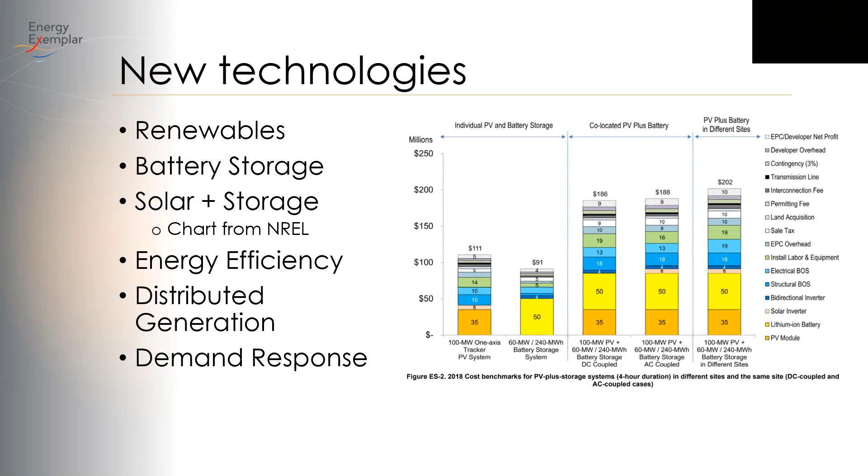So there are a number of different processes that are requiring a rapid pace of insight. IRP for many utilities was optional until fairly recently. A lot of utilities are being required to conduct IRP analysis that they formerly were not required to discuss or produce to the regulator. And very often the breadth of those IRPs are also increasing.

So where once it might have been adequate to do a study that focused primarily on thermal resources, in many jurisdictions, an IRP that doesn't take into account renewables or energy efficiency or other things like that might not be considered to be meeting the standard for that project, the IRP.

There's a lot of other kinds of economic analysis, although one that I've been hearing a lot from our customers about in recent years is the desire to do more value at risk analysis. They want to look at variability, maybe in load or fuel price or any number of drivers of uncertainty, and understand how much value they may gain or lose simply on the basis of said uncertainty, and how they can reduce the amount of uncertainty in that.

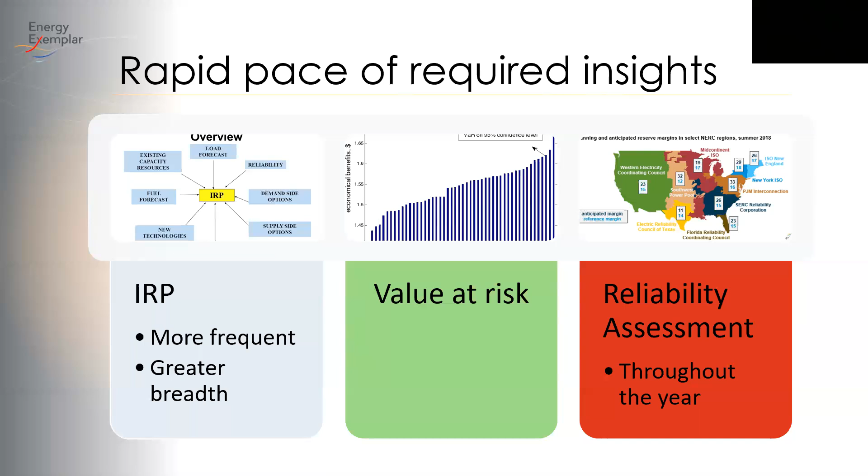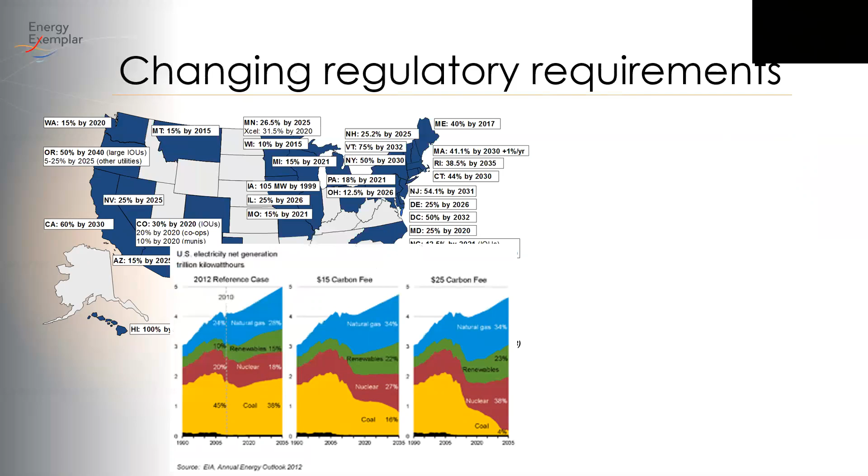And then there are changing regulatory requirements. There's an awful lot of them. There's RPS targets, there's carbon taxes, there's regional greenhouse gas initiatives, the RGGI. There are all kinds of energy efficiency programs, and so on and so forth.

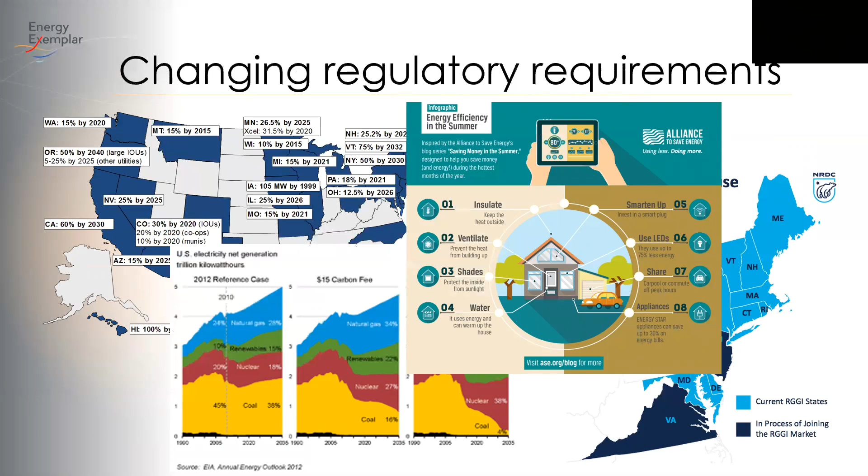Any questions about any of those things before we continue on? Hearing none, I'll proceed.

So one of the innovations that I think is very important for addressing a lot of these concerns is co-optimization. I think a lot of us on the call have certainly heard this word used a lot. I wanted to take a minute to talk about what co-optimization is and perhaps what it isn't, and what even is really meant by co-optimization in the first place, and talk through some of the aspects of co-optimization.

So what is co-optimization? Generally speaking, the idea is that you have a lot of different factors involved in a certain kind of economic or physical problem, and you can value each of them. And then what you'd like to do is formulate a single problem that looks at the options, all of the values associated with all of the different commodities you are considering, whether that's energy or ancillary services or emissions or gas or hydropower or perhaps other things as well. And you want to be able to trade them on an even basis with each other, not in the sense of creating a financial trade, but to be able to swap them.

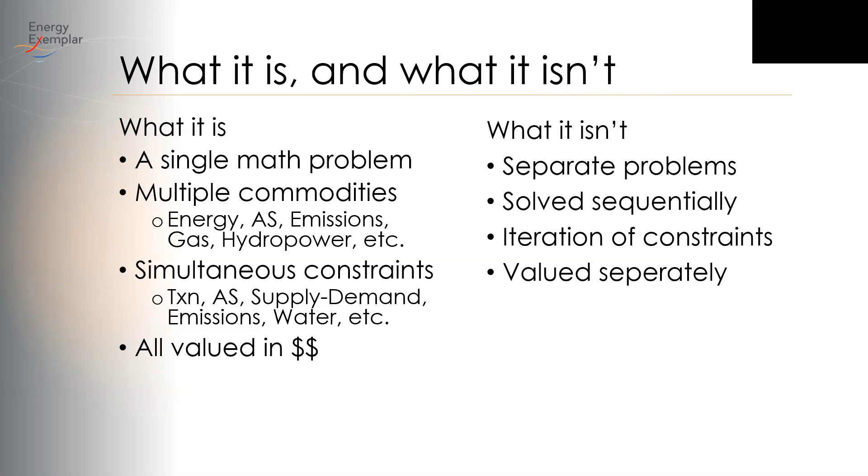So what might it not be then? Or by contrast, what would maybe not be a co-optimal solution? Well, if you are separating the problem of solving a power system up into several different pieces and solving them individually or sequentially, and then iterating on the constraints, this isn't so much a co-optimization as a sequential optimization. Now it may seem like that is a pretty tight difference, but I wanted to work through why a sequential solution might not be the best thing to do.

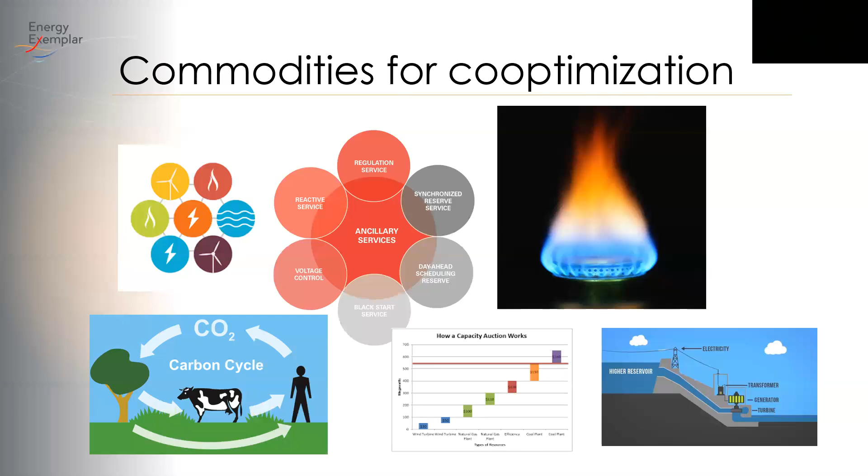But first, here's some commodities that you might want to co-optimize. So we've got a lot of different things: ancillary services, energy from various sources, natural gas, carbon, capacity, hydroelectric resources. I kind of mentioned all of those already, but so what could be the problem with solving this sort of problem sequentially?

But there's a number of problems with this. One is the halting criterion, the answer to the question, when do I stop? It's not easy to know how to answer that question when you're looking at a sequential solving operation. A more important question maybe is, when I've got a solution, how close will I be to the optimal solution? This process may or may not be able to tell you the answer. And how close will I be? You may not be able to say that either. In fact, it probably will not.

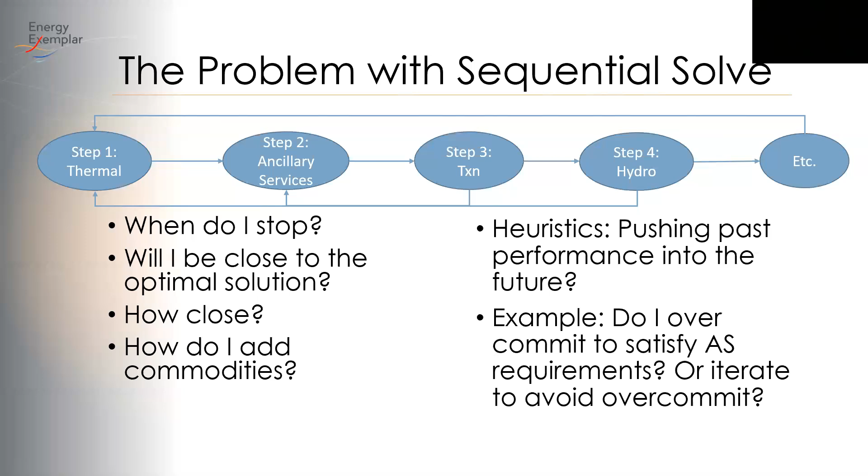So another piece of this business of co-optimization is that, very often due to the type of problem you're going to solve, the kind of objective function, the dollar value that you're looking at is going to be derived in different ways.

One kind of scale of problem is this very long-term problem where you've got questions of capacity expansion, resource retirement, and production cost, and you're trying to consider all three. If I looked at that with historical or heuristic approaches, I'd be thinking: first let's optimize expansion cost, then optimize production cost separately, and if it looks too costly, I'll maybe add some more generators. But in a co-optimal model, you'd be looking at expansion, retirement, and production cost all in one pass.

So that would be a difference between a heuristic model with sequential iteration versus a co-optimal model that looks at the whole thing simultaneously.

In the case of reliability and issues of maintenance scheduling or loss of load, very often the objective function is not necessarily the dollar value. In this case, the objective function is usually related specifically to reliability and avoiding lost load. So I'd have a very different kind of objective function because my overall purpose in this sort of modeling is different.

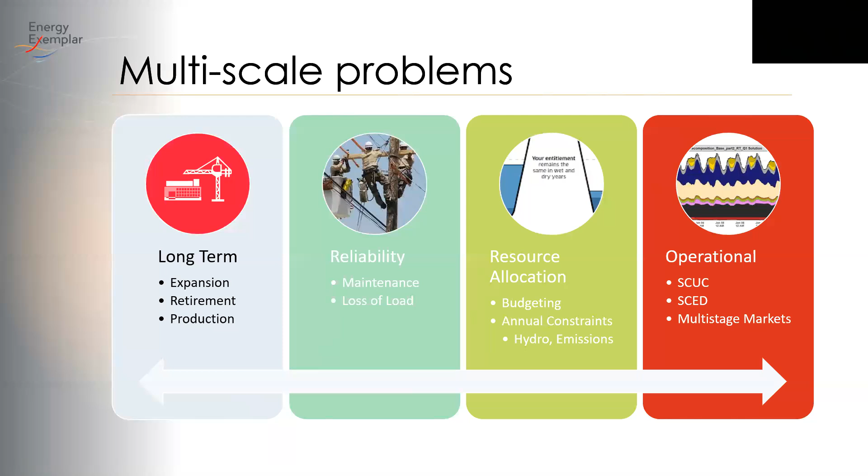This is also a place where you'd model day ahead, real time, or residual unit commitment markets as well.

Any questions about any of those things before I go on?

All right, I'll continue. So another thing I wanted to talk about was performance. I mentioned earlier this business about having more computing power than we once did. There was a period of time where the idea of a heuristic or iterative model made a lot of sense, because we didn't have as much computing power as we do today.

But the primary technique that people use for most of these kinds of modeling today is mixed integer linear programming. This is computationally intensive and memory intensive, and it's also a well understood mathematical problem. Because it's well understood, we have tools available not just for modeling power systems, but for modeling lots of different kinds of optimization problems that are very performant.

We also spend a lot of time these days thinking about how to reduce runtime and memory use for large models, and the models we're trying to solve these days are getting bigger and bigger. If we were to roll back the clock 20 years, running 8760 power flow plus economic unit commitment and dispatch with mixed integer programming unit commitment was just too big of a problem. These days that's very attainable, and a lot of it has to do with techniques for reducing runtime or memory, plus growing computational power. There's also the question of how to parallelize some of the underlying calculations.

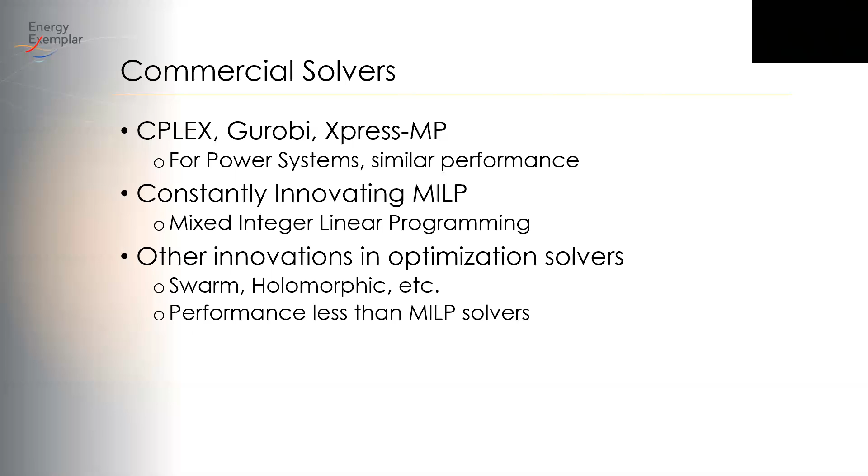But for now, the performance of those kinds of techniques is still less than the performance of mixed integer linear programming, but that's something we're certainly keeping our eye on.

How about reducing runtime and memory use? Well, I mentioned that parallelization was a big factor in that. So I've noted three ways that we go about parallelizing problems, ways where the power system model will actually benefit from it.

The first is parallelization over the chronological period of time. Now, what we know is that if we tried to parallelize by splitting every hour of the year into a separate problem, the result would be nonsense. We could end up committing a coal-fired power plant in hour 1, then a separate problem decides in hour 2 it should be off, and a third problem decides in hour 3 it should be on. Since none of those have any knowledge of what's happening in the previous or following piece, they end up with a discontinuous commitment of that resource in a way that doesn't make much sense and probably doesn't adhere to its minimum downtime or uptime constraint.

So splitting hour by hour, or 5 minute by 5 minute, might not be feasible, but you could, for example, split up the various months of the year. If you ran each month separately, you'd be able to run those pieces in parallel with each other. Now, the question you'll ask based on what I just said is, well, what about the end of one month and the beginning of the next? Could there be a problem there?

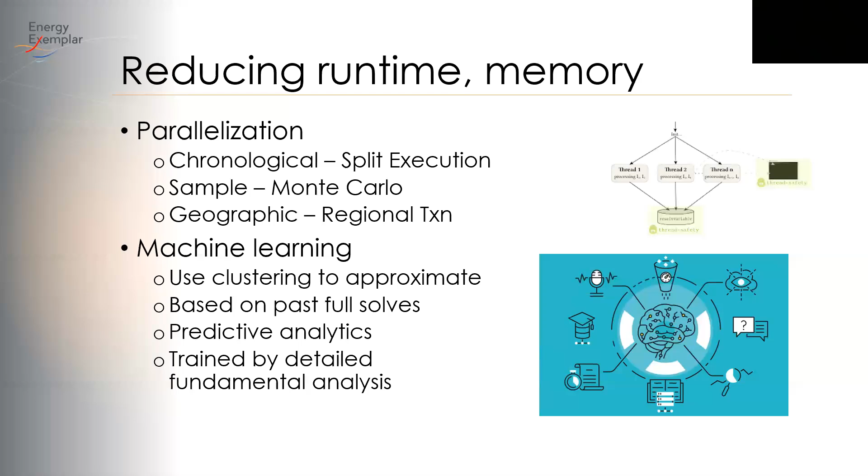Any questions about any of that before I proceed?

Okay, so another thing that's a pretty important component of innovation in power systems is understanding uncertainty in these sorts of systems, and a lot of times people refer to that as stochastic analysis. I would like to draw a bit of a difference between uncertainty per se and stochastic optimization. So many people have heard about stochastic analysis, and most of the time what they're thinking about is what I would call a Monte Carlo simulation, which is certainly a kind of stochastic analysis, but it's only one of several different methodologies for understanding uncertainty.

In a Monte Carlo, you take a very specific sort of methodology to understand how uncertainty impacts your results. But then there's also another idea called stochastic optimization. Instead of thinking about separating up several different samples, in a Monte Carlo you would just have a number of different samples and you'd run each of them individually, and you'd look at the results of each of those individual runs and average them together.

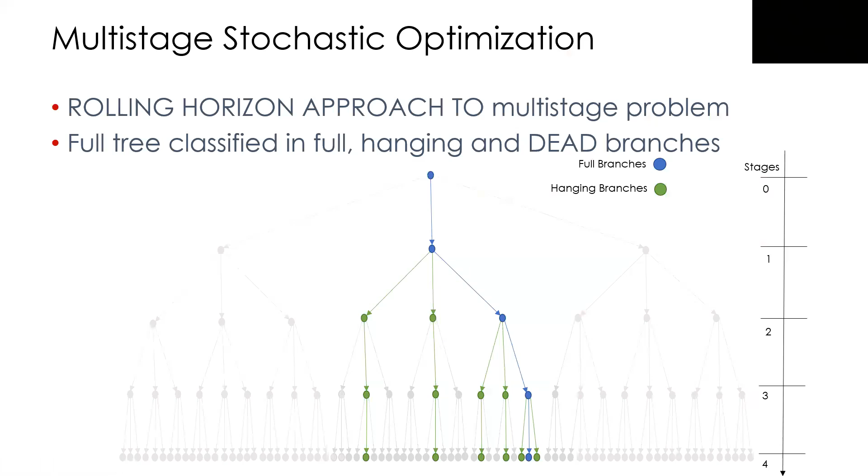Now, part of the reason we do this rolling horizon approach is that the further you get down the path, the more moves you're thinking about ahead, the lower the probability of each possible outcome is going to be. So if at every stage we have 5 choices, then at the end of the second stage I've got 25 choices. At the end of the third stage, 125 choices. At the end of the fourth, 625 - and I don't even know what 625 times 5 is, but it's a lot.

You can see on this diagram that if we were talking about 20 or 30 choices, after a certain number of stages the probability of each possible outcome is really, really small. So it doesn't make sense to go all the way to the end and look at the probability of each individually, because the probability that any one of those is going to happen is so small that we just don't have any confidence we could pick the right one. So what we do is go forward a few steps and look at things that have a probability that might actually happen, like 0.01%. That's a very unlikely thing, but it's still not vanishingly small.

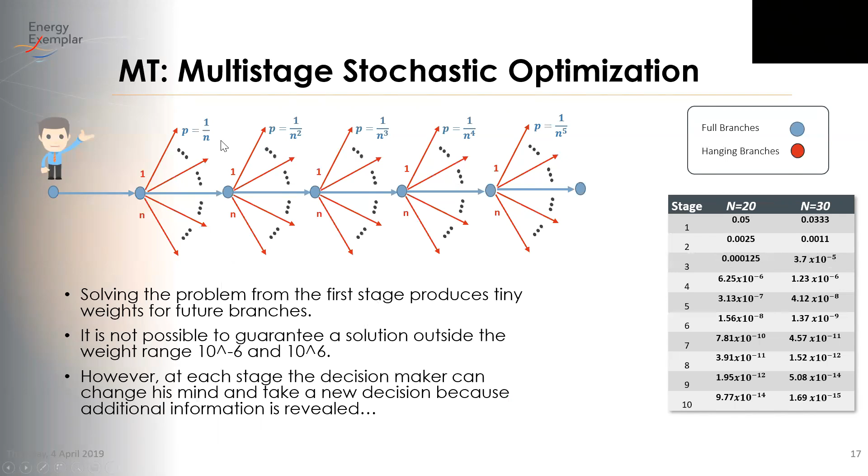This is a bit small here with 30 choices, but we'd only maybe go forward to the third stage. So if we have this entire horizon that goes through 5 stages, the first time we just look at the first 3 stages maybe. After we've looked at those and made some decisions, we would look at the second 3 and move forward one choice. That means in this scenario, I could move back here and make a new decision, but then once I move forward, this decision is decided and I can go forward from there. That's how the rolling horizon approach works.

Any questions about that before I proceed?

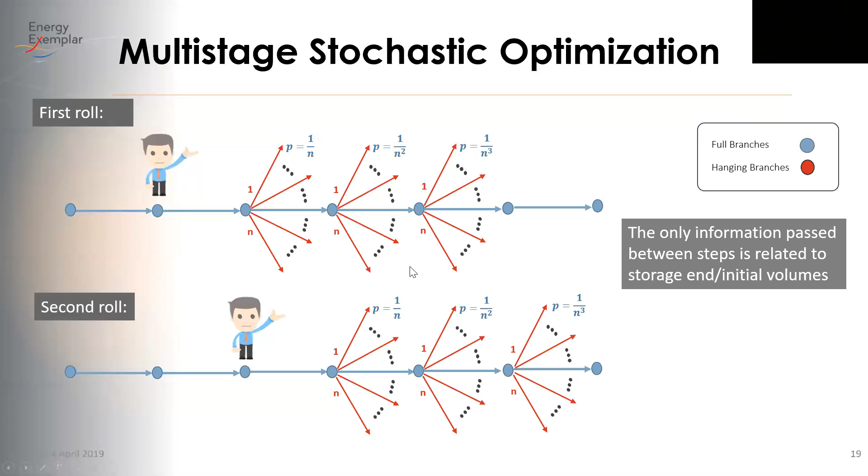One of the things I'd like to mention is that in addition to thinking about long-term things like emissions or hydro resources on a budget timescale, it also makes sense to think about this for unit commitment. Because I might have a plant that I want to commit, and if I commit it today, it has an impact possibly for several days. So if I commit it today, I don't want to take it down tomorrow and then fire it back up on the 3rd day.

Maybe I would like to look at this in a stochastic optimization view, and that's why we have capabilities around what we call stochastic unit commitment, which is where you're looking at possible forecasts for the next day to decide, based on a path of least regrets, not necessarily the absolute best unit commitment for the very specific forecast we have, but a unit commitment that is both pretty good and also avoids the worst possible things that could happen tomorrow, and anticipates them. So any questions about the stochastic analysis piece before I move on?

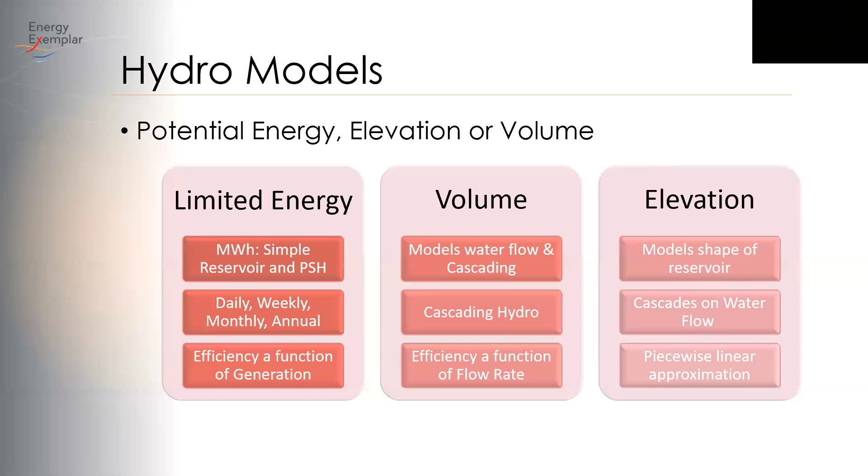It's also important, and an important innovation in this space, to think about all the possible different constraints that could affect hydro, not just at the hydro plant itself, although that's pretty important, but also downstream. It takes time to move water from point A to point B. You have to worry about how fast you change the amount of outflow in these sorts of resources. And being able to model those things allows us to have a more accurate representation of hydropower as part of an overall portfolio.

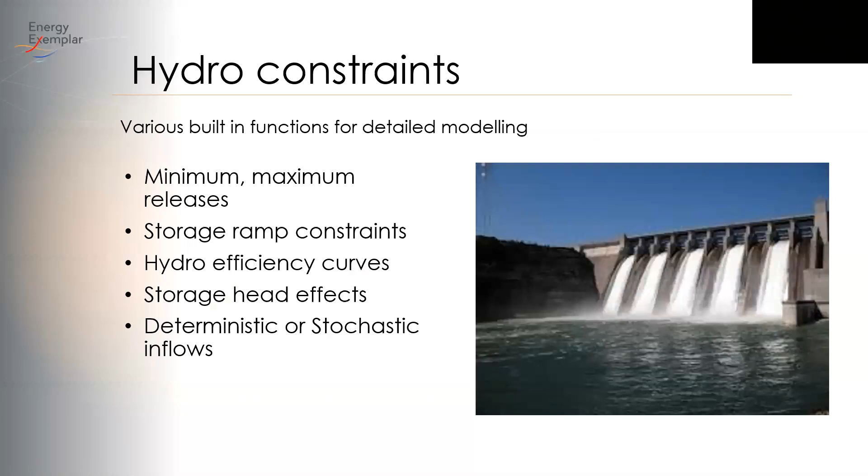And then there's the idea of co-optimizing hydropower resources with thermal resources. Sometimes you can use hydropower resources to avoid the need to start a thermal plant if you do it strategically. And likewise, you can conserve water if it's very valuable at any particular point in time by running a little bit more thermal resource. So this is a water value-based approach, which allows you to think about hydropower as a commodity that's on even footing with other resources in the portfolio.

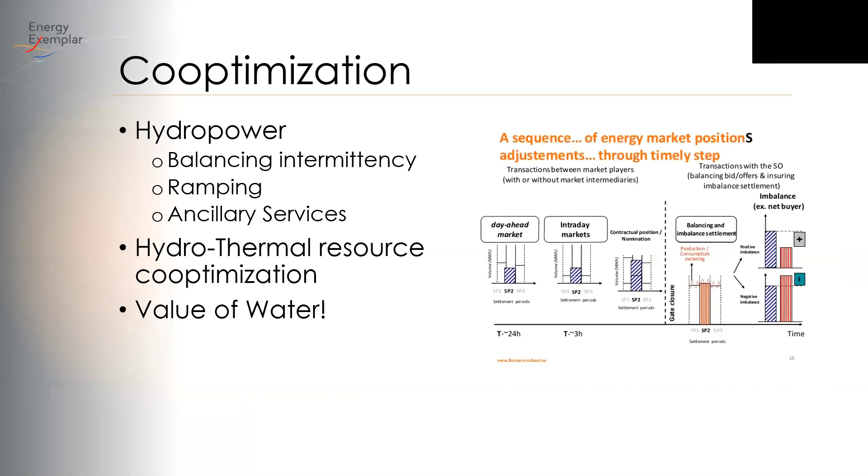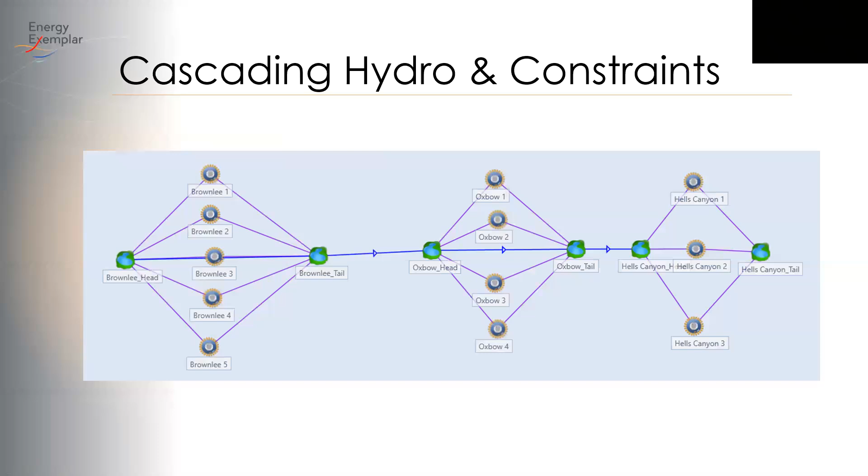What that means is that holding water in one reservoir or another, the water has the most value when it's sitting at the very top of the system, because that water has yet to be processed through all 3 plants, and it can produce value as it does that. But at some point, the water needs to go down through the system and out to the sea, or to whatever subsequent uses it might have. So being able to represent the constraints that link together any 2 power stations, and so forth, is quite important to understanding the operational behavior of these sorts of resources.

So any questions about any of those things? I wanted to have Laura close with a few words about Energy Exemplar, the company.

I hope that you found the content here valuable, and that it gives you some thoughts about how much innovation is required for these kinds of modeling platforms, and what sorts of things we at Energy Exemplar are looking to do in order to make sure you have the best tools available to you. But I'll turn it over to Laura and let her wrap up.

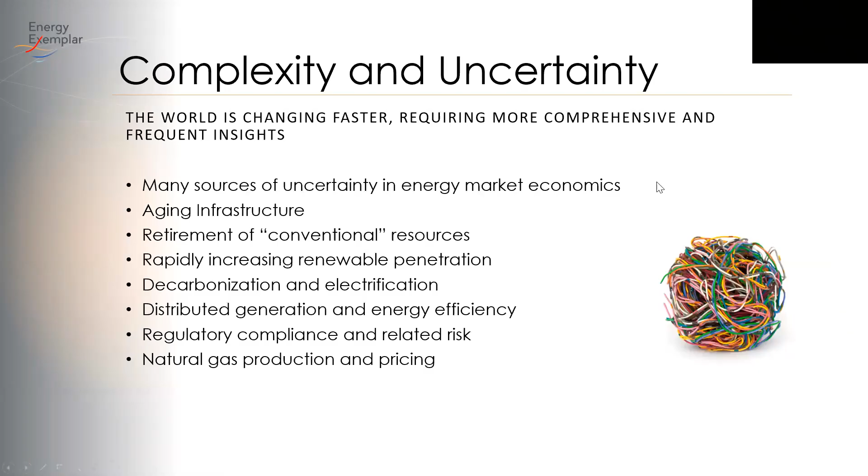And so this jumbling of factors that utilities and transmission companies are having to prioritize and wade through have really created the situation that Energy Exemplar finds itself in today, which is a really exciting one, where we've charted a pathway to address this uncertainty by joining forces with Plexos as well as Aurora. So now the two best products in the market are sitting side by side under the same overall product team and data team, in an organizational structure that's now internationally planned.

And we've done this through partnership with Riverside Company. Riverside has really been incredible because it's allowed for significant growth in our products and our teams as well. This started in late 2017, but you'll really have seen it ramped up today.

And what's great about Riverside is that it's allowed us to focus on growing the business and the top line and bringing new advancements to our product offerings, rather than other private equity firms that you'll see out in the market that are more focused on slimming down in order to just increase the bottom line and then flip. So Riverside is really focused on this growth piece.

And the way that's really translating for our user community is that it's increasing the level of engagement across all points of the user's journey with our products. So on the next slide, Stephen, I think you went there.